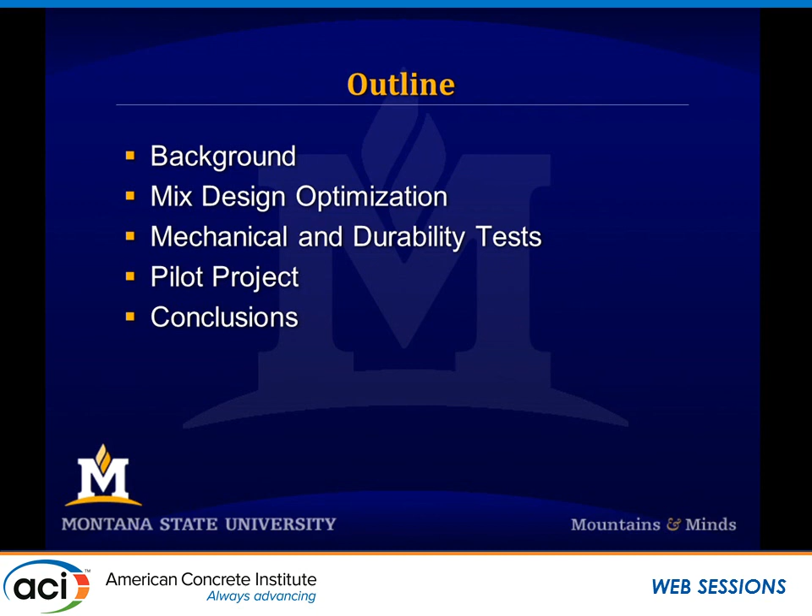So to start things off with the background - as I mentioned a second ago, this is a very important part of this project, why would we do it, right? You might be questioning that right now. Why would you take reclaimed asphalt pavement, millings off of an asphalt highway, and put it into concrete to use it as a pavement? That's a very good question, a legitimate question.

One of the reasons, and I think that Montana has a pretty good reason for doing so: there are large stockpiles of RAP in Montana. Why is there large stockpiles of RAP? Well, one reason is Montana is the 4th largest state in the country in terms of size, not population. We're sitting at just under 1 million in population, but the 4th largest state in terms of area. And that means there's a lot of roads, right? And there's a lot of maintenance on those roads, and we then accumulate a bunch of RAP.

Well, RAP typically gets used quite often as aggregate replacement in hot mix asphalt. But the contractors in the state of Montana do not use it extensively back into their asphalt pavement. And in parallel to this project, MDT is trying to encourage and come up with a means of incentive for contractors to start using it more in their hot mix asphalt. But in the meantime, they came up with another need for it, and that's using it in concrete pavements.

The other thing is we have reduced aggregate supplies in the state of Montana. In the western part of the state, where most of our population is, near the mountains, we're okay with aggregates. You go into the eastern part of the state, there's not very many people, not many aggregate or rock quarries and stuff like that for producing aggregates. And so that's somewhat of a shortfall.

And then the primary reason for trying to come up with using reclaimed asphalt pavement in concrete pavements is the Bakken oil boom. If you're from the general vicinity of North Dakota and Montana, you can't go a day without hearing about the Bakken oil boom and its impact on the economy and the infrastructure around there. This Bakken oil boom, with development of fracking and whatnot, there's been a huge boom in eastern Montana and western North Dakota, and this has brought along with it heavy truck traffic that is destroying their asphalt pavements. And MDT would like to add a concrete pavement because it's more durable and they believe that this will withstand the heavy truck traffic better.

And so, behind the theory that they want to pursue, they want to come through and mill the top off of their asphalt highways, then process that RAP minimally, and then put it back down in a white topping, like a 2 or 3 inch topping slab on top of what they had just milled off, and they want this to be more durable. So that's kind of the driving factors behind doing this.

Other states are looking at using RAP. Illinois just finished a study to use RAP in their concrete pavements, and one of the reasons for that is they're using their fine aggregates in hot mix asphalt, but their coarse RAP they're not using, so they have big, giant stockpiles of coarse RAP. So the outcomes of this research could be further reaching than just Montana.

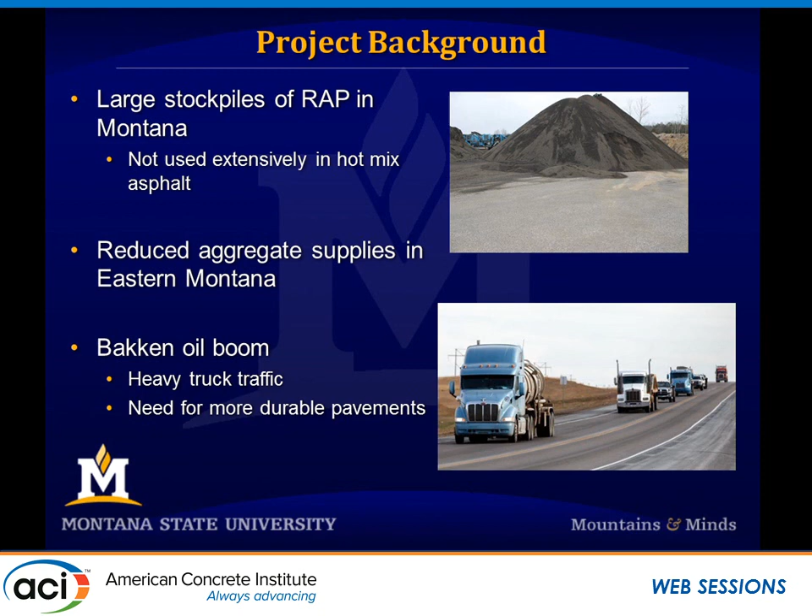The first thing we came up with was establishing a RAP source and coming up with a minimal processing technique. All this research was conducted with RAP millings off of I-15 near Great Falls, Montana. It was minimally processed, meaning we just took the RAP millings directly out of the miller, then screened it on two different screens, a 3/4 inch screen and a number 8 screen. Everything above 3/4 inch caught on that was tossed out as waste, just big chunks of tar and whatnot.

Everything that got caught on the number 8 sieve we called coarse aggregate. Everything that made it through the number 8 sieve we called fine aggregate. We did not do any washing of the aggregates afterwards. This process yielded acceptable gradations.

This is the gradation curve of the fine aggregates, and you can see it's within the limits of the MDT specifications for fine concrete aggregate, or you can just take my word for it. In terms of the coarse aggregate, we deemed this acceptable. It's off on a couple of sizes, but not too bad, especially considering where we got it—just milled it up off the surface, split it on number 8, and called it good.

That was our minimal processing. Another important aspect: it yielded about twice as much coarse as fines doing this, so by weight we had about twice as much coarse aggregate as fine aggregate. This was consistent between RAP sources—we tried a bunch of different RAP sources from around the state, and these gradation curves were about the same when we applied this process. So that was our RAP source.

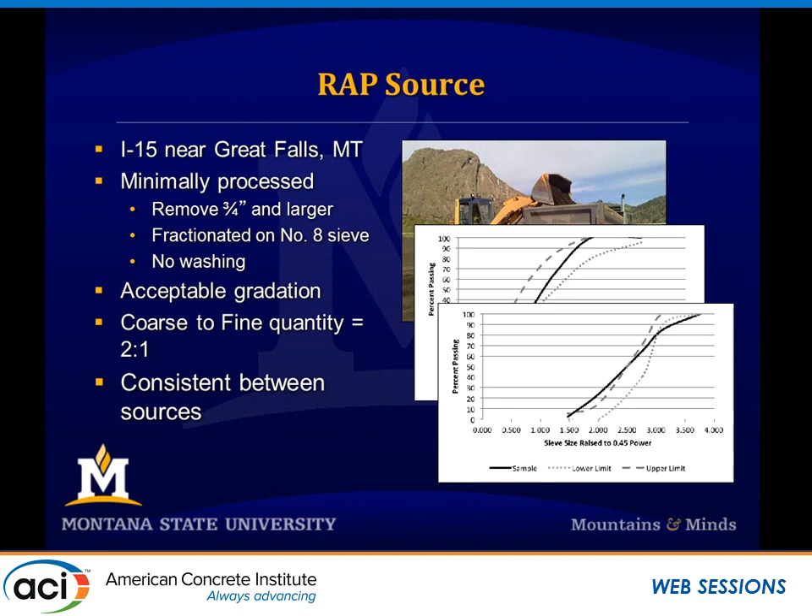We did find some issues with it. When we tried to quantify the moisture content, that was very difficult. All of this stuff has an asphalt coating on it, so how you define what SSD is, what the moisture content is, and how you heat it up to dry it out so you can measure these things, was really difficult. We decided this is going to be an issue going forward.

The other issue was these conglomerations of binder and fine aggregate. Here are some pictures of cores we took afterwards—you can see both of these would be considered coarse aggregate, right around 3/4 of an inch, but it's not really a coarse aggregate. It's really a clump of tar with some fine aggregates inside of it. We believe this played into our decrease in performance, which we'll get into in a little bit.

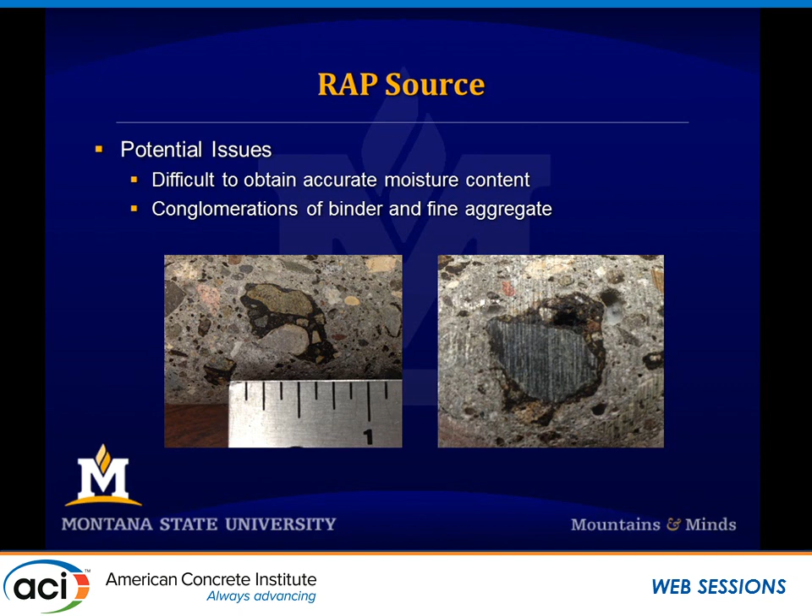But we wanted to stick with our minimal processing technique. So in terms of mix design optimization, how do we come up with mix designs to meet our objectives? Our objectives were: we wanted to use 15% fly ash replacement, to help control ASR and help on the green side of things—we just wanted to replace some of the Portland cement. So we had that fixed parameter, 15% fly ash replacement.

We also wanted to maximize the RAP content. Previous research and some of our screening batches told us that you can't replace all the aggregates in concrete with RAP—if you do, you don't get a very strong concrete and can't meet some specifications. So we had to replace just some of the virgin aggregates with RAP, but we wanted to use as much RAP as possible. We also wanted to meet the minimum MDT pavement specifications, which call for a pretty stiff mix of 1.5 inch slump, because they use a slip form paver for casting these concrete pavements.

So 1.5 inch slump, 5 to 7% air, minimum 7-day strength of 2,000 psi, minimum 28-day strength of 3,000 psi, and rupture strength of 500 psi. So those are our constraints in our mix design. We wanted to meet those things.

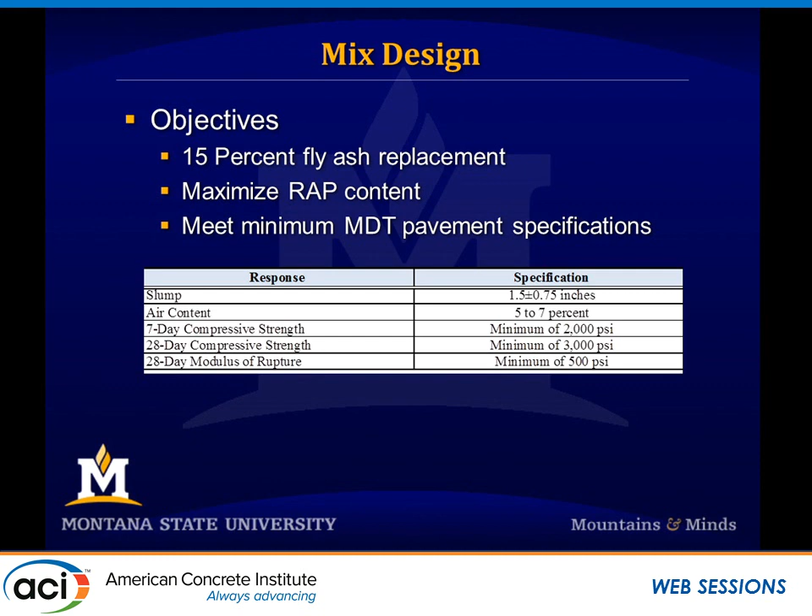Okay, now how we went about doing that, right? There's some other methods out there that you can use for mix design. We chose to do a response surface methodology, one of the reasons being it was just more scientific-y. It seemed like it'd be a little more fun to do.

You know, I'm a professor, I'm very theoretical by nature, and I had seen response surface methodology, often called design of experiments, get used. What it's used for is to determine the relationship between variables and responses. The variables in this case we can think of in terms of the mix design—what the paste content is, what the water cement ratio is, what the RAP replacement rate is. Those things are considered variables, and those have effects on responses.

Response being 28-day compression strength, slump, air content—those are considered responses. And so it's a method for coming up with a relationship between those two things, in particular when there isn't a mechanistic relationship between it—when there isn't a direct cause and effect type of thing.

It gets used routinely in industrial processes—in this case, misspelled processes. So I know that that's misspelled, don't judge me on that, I just noticed it a second ago. So industrial processes, it gets used often in that, right? And it does not get used in concrete mixture design very often. It has been used a few times, but not too much.

But what it allows you to do is, for a minimal amount of trials, maximize your output. You understand more of the process with a minimal amount of trials. It gives you interaction between variables, and then it works really well for optimization. So this is kind of the reason behind using this response surface methodology. If you're familiar with it, we chose a central composite design for various reasons, but that's the design that we use.

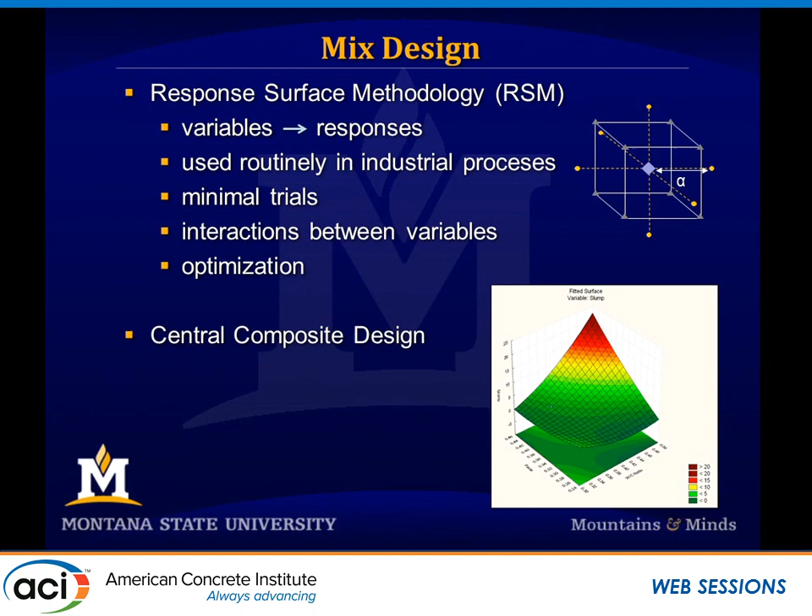So we did a little research project within our research project to apply this methodology to optimize our mixes. The way the procedure works is you go into response surface methodology and say, these are my variables and these are the ranges of my variables. Then the response surface methodology says, great, do these mixes. You then perform those mixes and measure the responses. Once you get those responses, you plug it back into the response surface methodology, and it fits some surfaces to it.

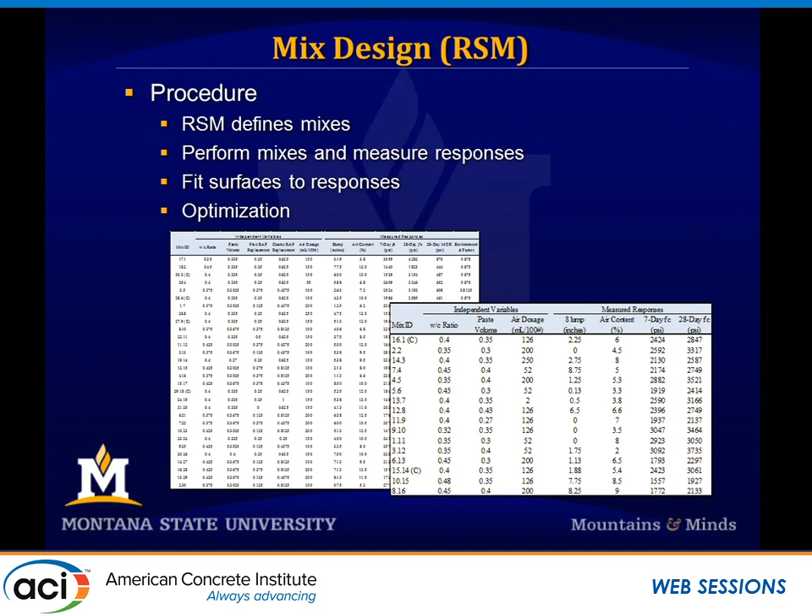And what this step is, is regression. It just fits equations to your responses and applies a bunch of statistics stuff that I don't quite understand fully at this time. But then it pops out these surfaces and confidence in those surfaces, and then you can use that for optimization. That's kind of the process used.

So it was carried out in 3 phases. We ran some screening mixes to get some general idea of ranges and whatnot—the ranges of the variables and what responses were important and what variables were important. Then we did a broad range response surface methodology over a big, wide range of variables, and in this case 5 variables and 5 responses, which resulted in 30 trial mixes.

We ran through those 30 trial mixes, and we had a few issues with it. Mainly, it was just off-center a little bit. We were targeting a certain area, and we were off a little, and so when it came to optimization, it didn't work out the way that we wanted to. So we did a more focused analysis where we narrowed our scope and redirected, which was 3 variables and 3 responses, and that one worked out really well. I'll talk to you a little bit more about some of those results.

There's the ranges. The variables that we used in the first one were water cement ratio, paste volume, fine RAP replacement, coarse RAP replacement, and air entraining admixture dosage. In the second one, we used all of those things with the exception of the fine and coarse RAP replacement.

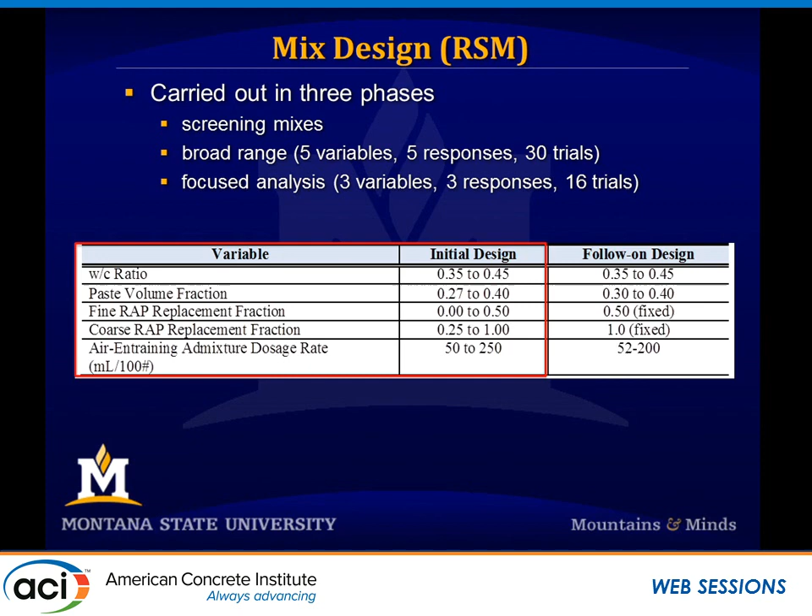Our initial study told us something about the effect of including RAP, and then we fixed that for the second response surface analysis. The first one was a good fit. We were off target a little bit, but some of the key findings told us where to aim the second time.

We were trying to use a standard moisture content correction method for mix designs, and we found out that wasn't working. It was adding scatter to our data, so we removed it and didn't do moisture content corrections afterward. That seems a little crazy, but it actually helped us control variability by not adjusting for water, because that was adding a bunch of variability to it.

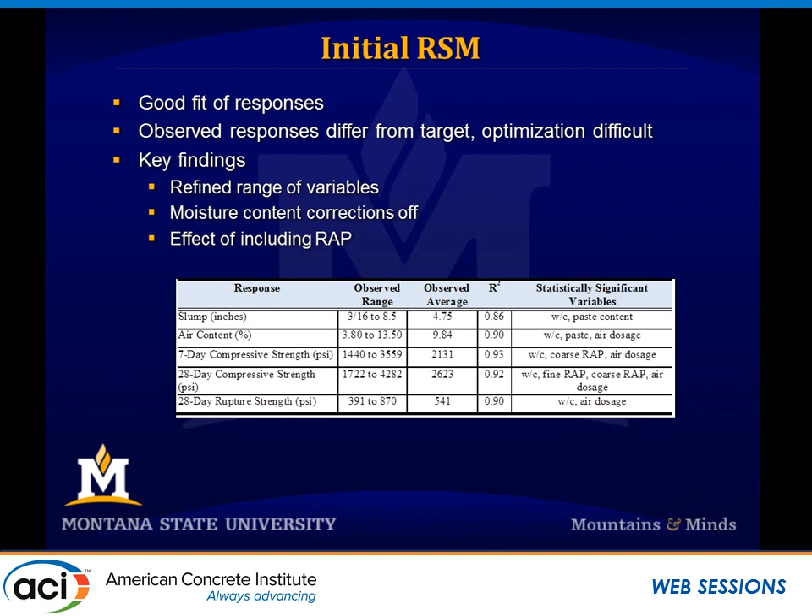And then the biggest thing it did is it told us the effect of including RAP. Including RAP did not affect slump or air, so it didn't affect our plastic state properties. But then it has a significant effect on strength.

This is 28-day strength on the vertical axis. On the horizontal axis is the fine RAP replacement rate, going up to about 50% RAP replacement. The difference between each of those lines is the coarse RAP replacement rate. Going from left to right, you see that our strength just tanks when we include fine RAP, and it also decreases when we include coarse RAP as well.

So that really quantified it. This was a surface fit to the data afterwards, and it showed us we quantified the effect of including RAP, with an R-squared value in terms of regression of around 95%. So the model fit it really well, it was just off target. So it does bad things to your concrete.

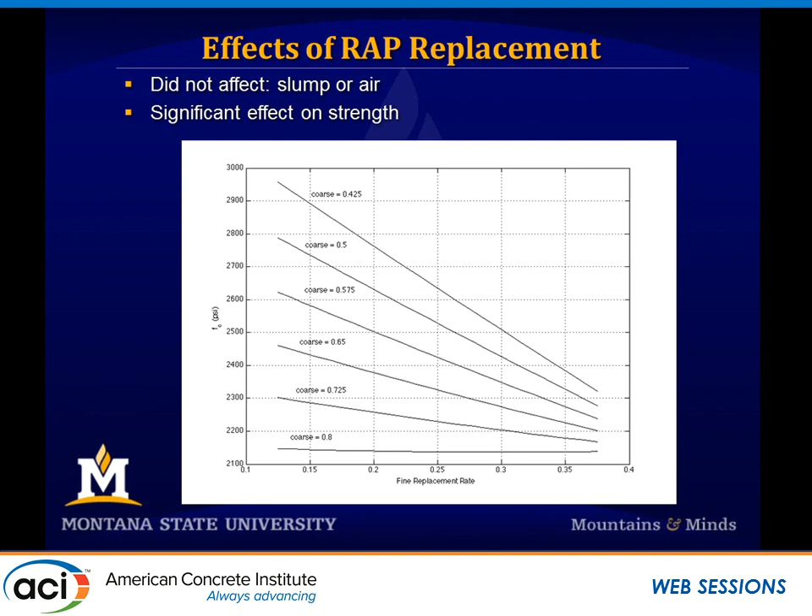And we think the reason for this is the asphalt binder that's on the outside of our aggregates. When we did our more focused response surface methodology, we fixed the RAP fractions at 100% coarse replacement and 50% fine replacement, because one of our goals from the beginning was to maximize the amount of RAP that we use in our concrete.

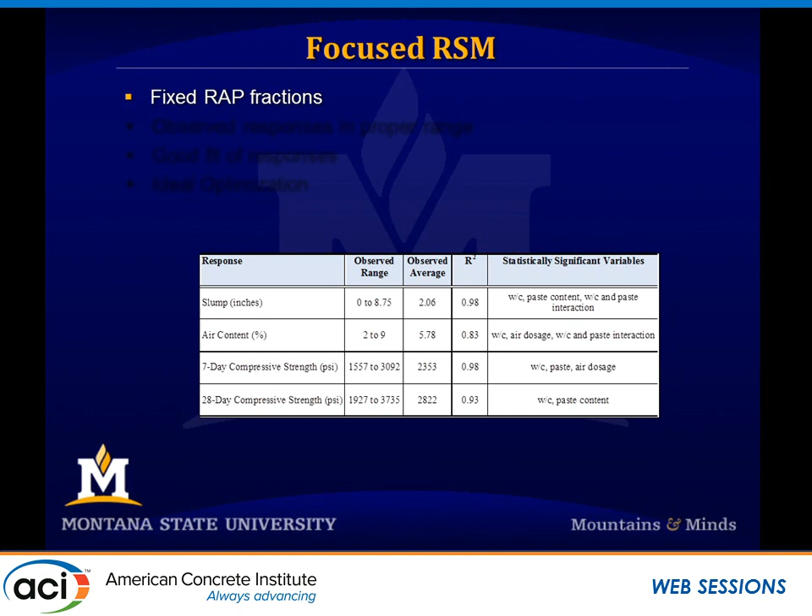We were getting a yield ratio of around 2 to 1, about twice as much coarse as fine. So using 100% coarse and 50% fine yielded about that 2 to 1 ratio, so we could maximize the amount of RAP. We knew we could meet the minimum specifications by throwing all of the RAP into it. So we fixed those things, and then we went on and looked for the paste content, the water cement ratio, and the air dosage rate that met those specifications.

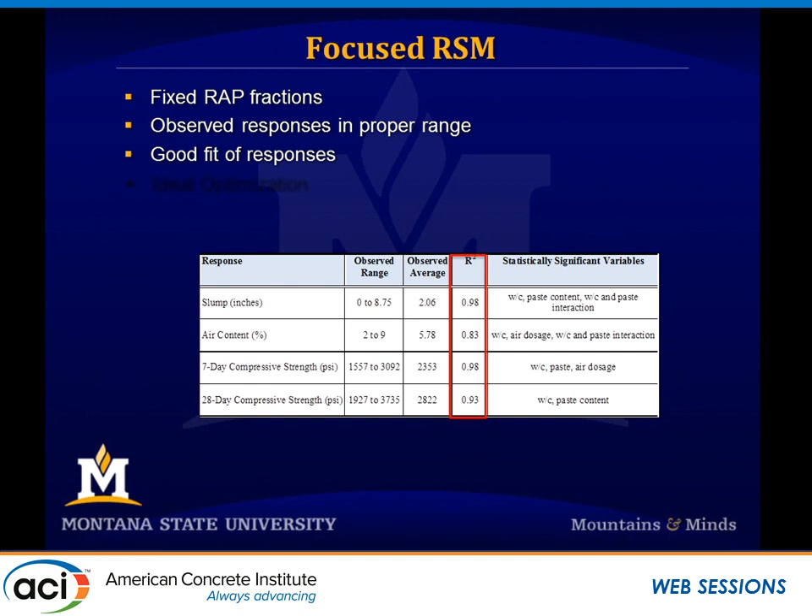So we ran this response surface methodology. Again, good fits. You can see that our observed range is about where our targets were, at 1.5-inch slump, 6% air, 3,000 PSI at 28 days. So we were in the general vicinity, so this one was going to work better. Our R-squared values, our measure of how good our equations matched the data, were in the 80s and 90s, so these are all good. It was ideal for optimization.

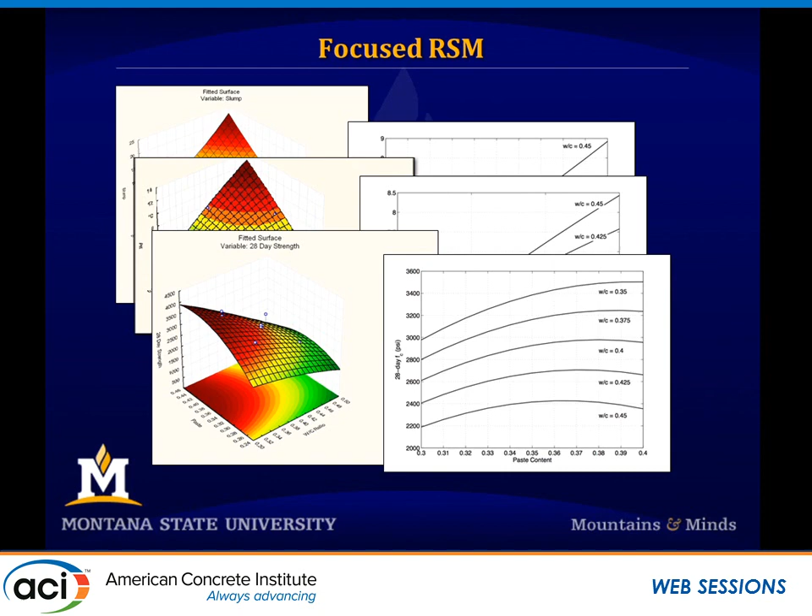So we tried some optimization. Here's just a plot of the curves, or the surfaces, for each of the responses, giving an idea of some of the output of running this response surface methodology. These are the response surfaces in response surface methodology, but basically these are equations that correlate the variables to the responses. Once we had these equations, you can use them for optimization.

So we came into this and said, all right, let's optimize this thing, let's get the mixtures we want. So we did one mix, and said, response surface methodology, give us something that meets all the MDT specifications: 1.5-inch slump, 6% air content, and 3,000 PSI, which is what we put on the constraints. We said give us that, and it returned: use a water cement ratio of 0.386, a paste content of 0.346, and an air dosage rate of 180.3 milliliters per 100 pounds of cement. So that's the output of our constrained problem here.

So once we got that, we came back and performed that mix in our laboratory and measured the responses. We got a 1-inch slump, 5% air, and the best for last, we predicted a 3,000 PSI concrete mix and got 2,949. Getting a 1-inch slump when we wanted 1.5 is within the 95% confidence interval, so we feel like we nailed that one. 5% air was within MDT specifications and within the confidence interval, so we nailed that one too. And 3,000 versus 2,949, right? So we're like, all right, this is working, this optimization is working.

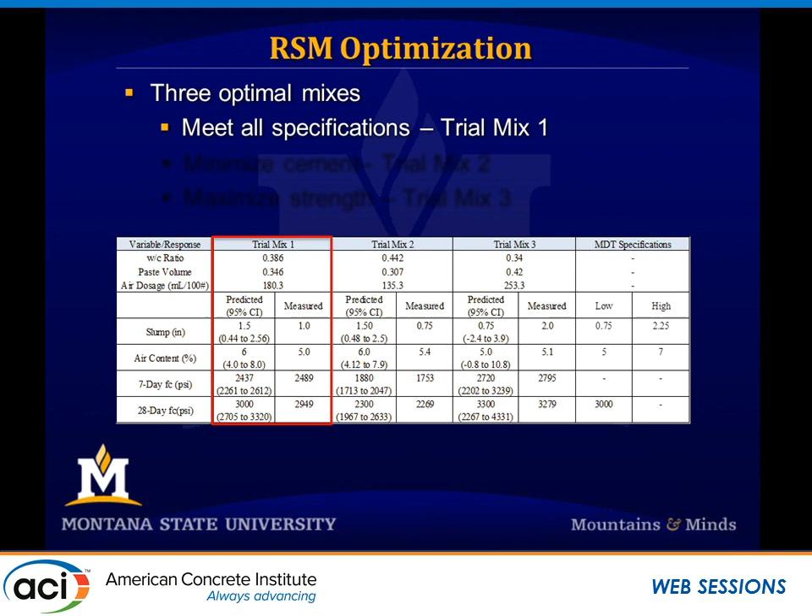So then we said, all right, let's play with this a little bit. One thing to note about this mix: 0.386 water-cement ratio and a paste volume of 0.346, this amounts to about a 7-sack mix. If you're familiar with concrete mixes, a 7-sack mix is pretty rich, actually very rich for a concrete pavement. They're usually in the realm of around 5.5 to 6.5 sacks of cement per yard of concrete. So this is a pretty rich mix.

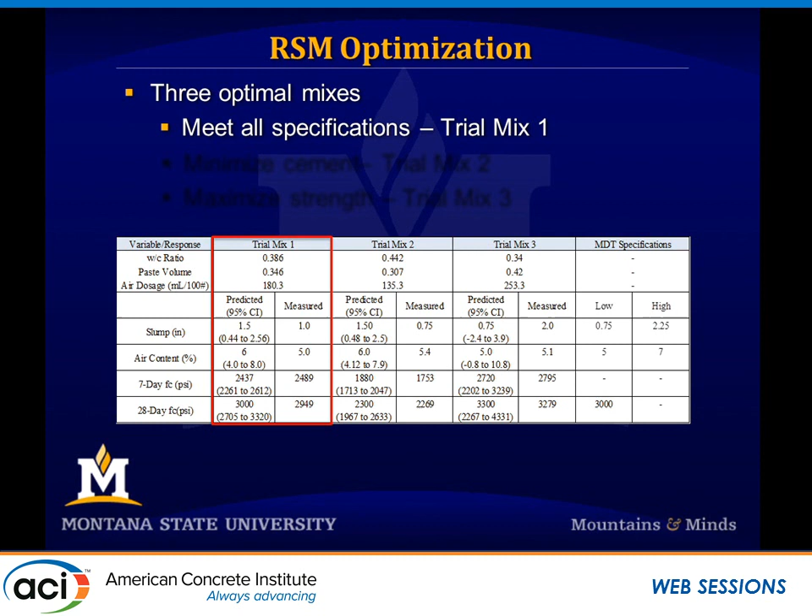So we said, all right, we don't want to cancel out the benefit by having to add a bunch more cement to this mixture. So let's minimize the cement. The way we did that was to just drop off that strength. By minimizing the cement, what you'd expect to happen is the paste volume should go down, because that's where the cement is in the paste. So the paste volume went down, and then to make it workable, the water-cement ratio had to go up. If you remove the flowable part of concrete, you have to add in some more flowable stuff, so you add more water to the mix.

So this is what the response surface methodology gave us, and it passes my test, what it should have given us. For this one, we predicted a 1.5-inch slump and got 0.75. Again, within the confidence interval and within MDT specifications. We got 5.4% air, and 6% was our target. Instead of 2,300, we got 2,269 at our 28-day strength. Again, it was right on. We were pretty excited about that.

We said, one more, let's do another one. Let's just maximize the strength we can get out of this thing. In order to maximize the strength, we put the slump at its minimum value, 0.75, the minimum accepted by MDT. We said, all right, let's drop some of the air to try to increase our strength. So we targeted 5% air, and then for strength we targeted 3,300. We were a little off on the slump, not too bad, and right on the predicted air. Then again, 3,300 versus 3,279, so our strengths were right on.

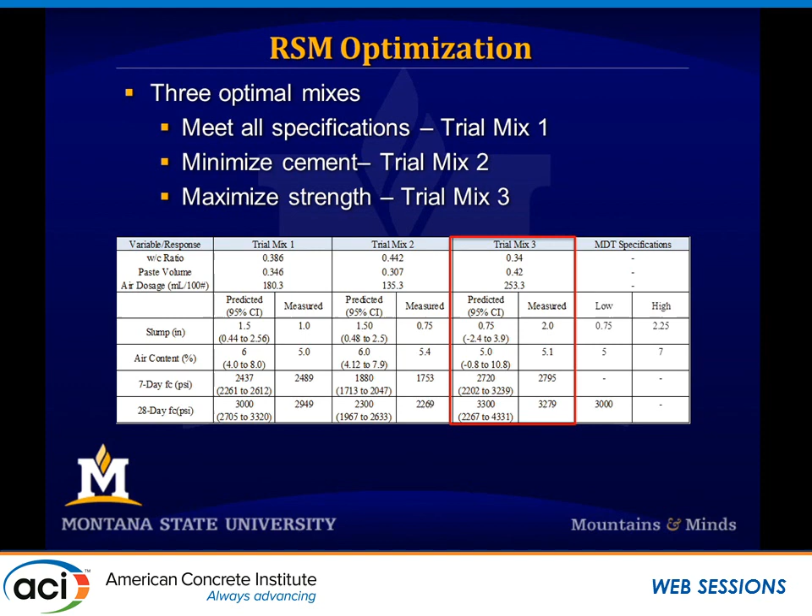This was telling us, wow, this methodology works pretty well. So that's kind of the conclusion of our little mini study, the application of response surface methodology. It works great for concrete mix design. But it did take us a little bit of time to get there—we had to do some screening mixes, then a broader scope, and then a more narrow scope. So we went to MDT with these results and said, hey, this is what we found.

And they chose trial mix 1 that met the minimum MDT specifications, and they were okay with the 7-sack mix. We do have a current study trying to get that down by using water-reducing admixtures and stuff, to make it less rich in cement. But they wanted to use the high-RAP mix because the goal was to use as much of this stuff as possible. Then they also said, you know, we want to meet these specifications and have a higher strength—we want around a 4,000 PSI concrete mix. Based on what we learned from the first one, we knew that if we cut the RAP in half, we would get that 4,000 PSI.

So we came up with 2 mixes that they wanted to further evaluate: the high RAP mix, which is the same as trial mix 1 that just met specifications, and a high strength mix that used half the RAP, so 50% coarse RAP replacement and 25% fine RAP replacement.

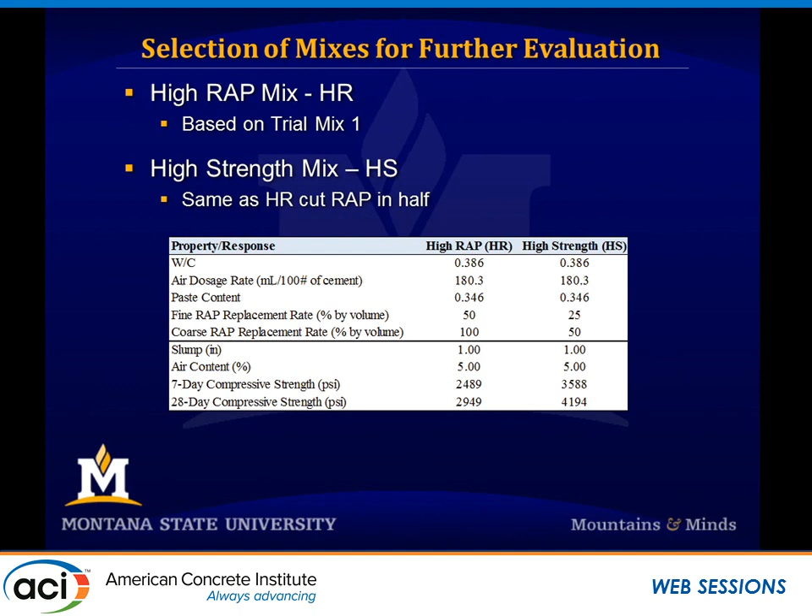And then we carried on a full suite of mechanical and durability tests. The mechanical tests we did were compressive strength, elastic modulus, tensile strength, shrinkage, and creep. The durability properties were alkali silica reactivity, absorption, abrasion, chloride permeability, freeze-thaw, and scaling.

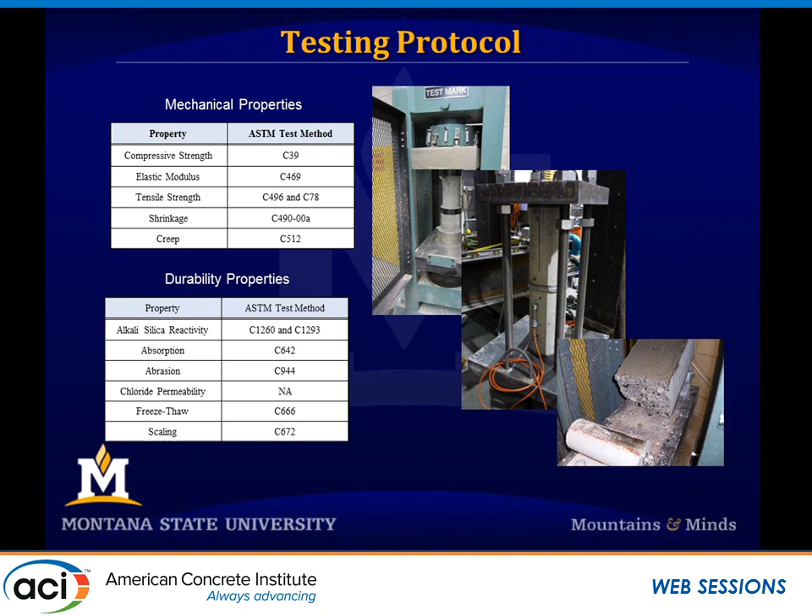So we knew that including RAP decreases your compression strength, but does that necessarily mean all of the other properties are going to be bad? I mean, does that mean your abrasion or your freeze-thaw performance is also bad? Not necessarily. And that's kind of what we found here - just because the strength is bad doesn't mean everything else is going to be bad. So we ran those things.

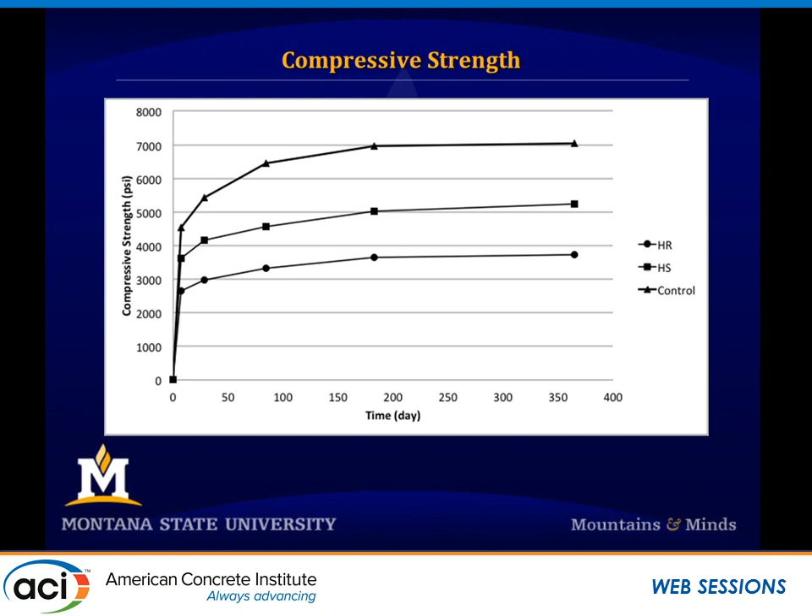Does that mean other things are going to be bad? Not necessarily. Do you need a lot of strength in a concrete pavement? No, you don't need 7,000. All you really need is 3,000, because pavements don't attract as much load or aren't counted on to carry as much stress as structural concrete. Here's the elastic modulus.

Florida DOT just completed a study on a similar project using RAP, and they did a finite element analysis using this reduced stiffness and showed numerically that just because you have decreased stiffness means you have decreased stress demand on your concrete. So this is a positive thing, the concrete being more flexible.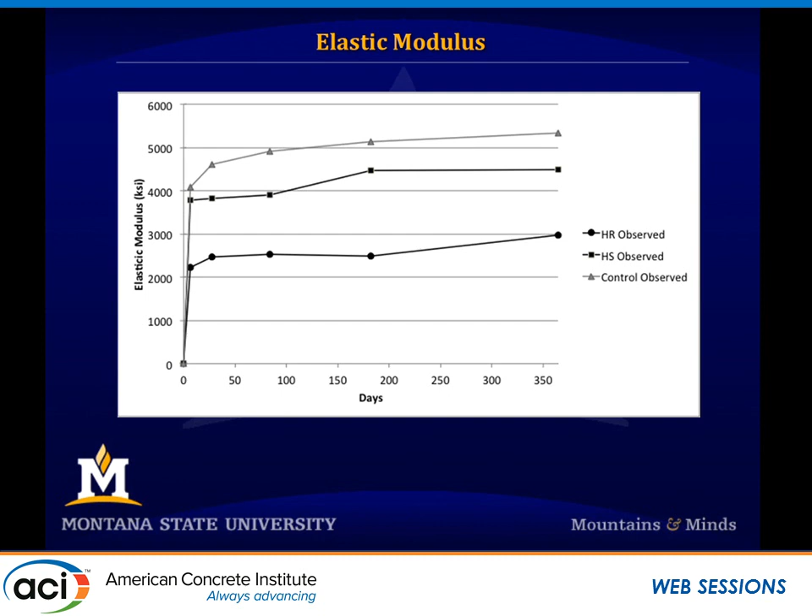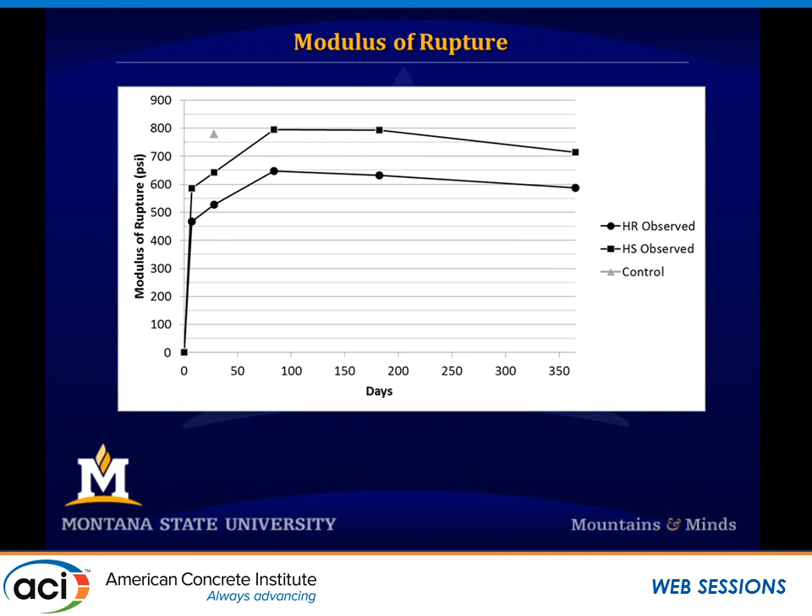Modulus of rupture, the tensile strength of the concrete - you can see an effect there, which goes along and is tied to the compression strength. So we had a decrease in compression strength, you would expect that your tensile strength would be decreased. But it does meet the specifications of 500 PSI that MDT wants, and we easily met that 500 PSI, even in the high RAP mix.

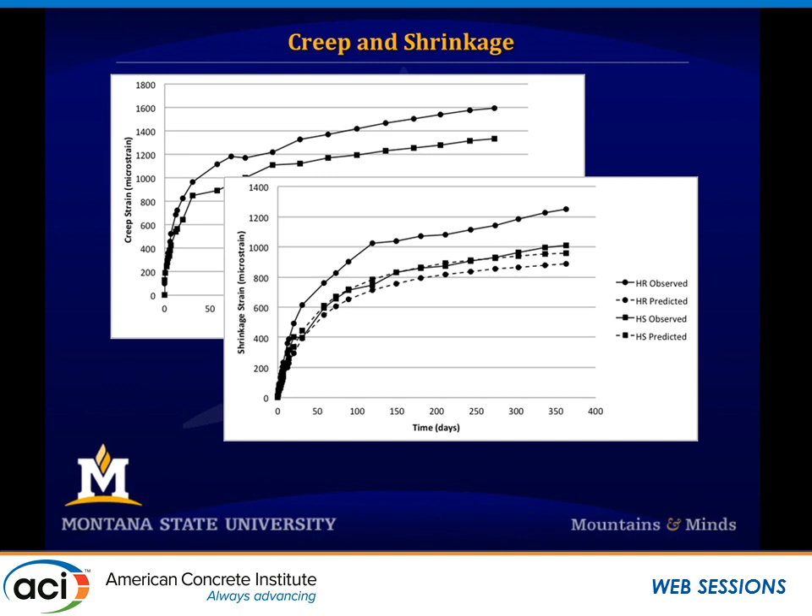Creep isn't necessarily something that's important in concrete pavements - it is in pre-stress and things of that nature, but in terms of pavements, it's not that important. But we had a creep frame and we tested it to help quantify some of this stuff. The high RAP creeped more than the high strength, and in terms of shrinkage, the high RAP shrunk more than the high strength mix as well. But it's also important to note that when we applied AASHTO equations for predicting shrinkage and creep, it was right on with predicting these things. So that's a little side note there.

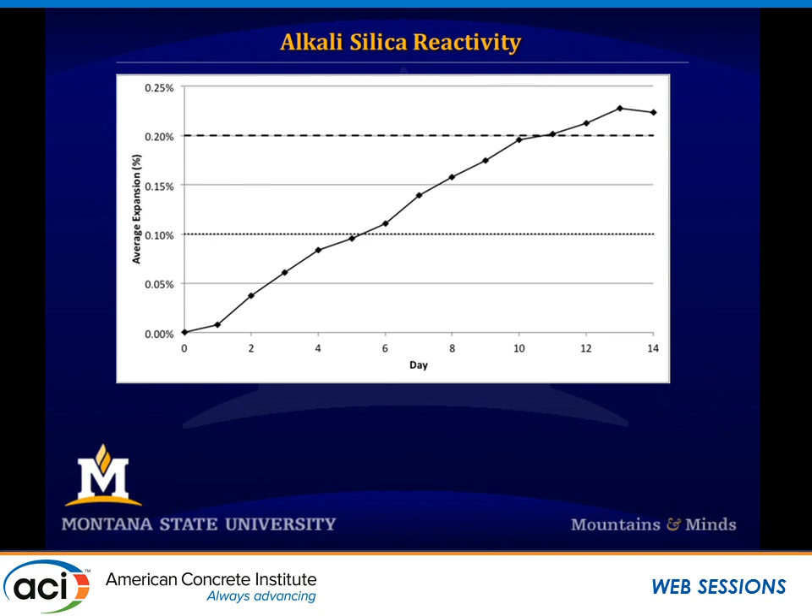Alkali silica reactivity in terms of durability - our data showed that it could potentially be an issue, but we found the problem to be that this is filled with asphalt pavement, so you have a tar coating on everything. This test procedure involved heating these bars up to 180 degrees, and when you heat tar up to 180 degrees, it changes its properties and expands. And that's what we're trying to test with ASR - the expansion.

That was affecting our results, so this test method wasn't necessarily applicable to this material. This was also found with an Illinois study using RAP, that doesn't necessarily work either.

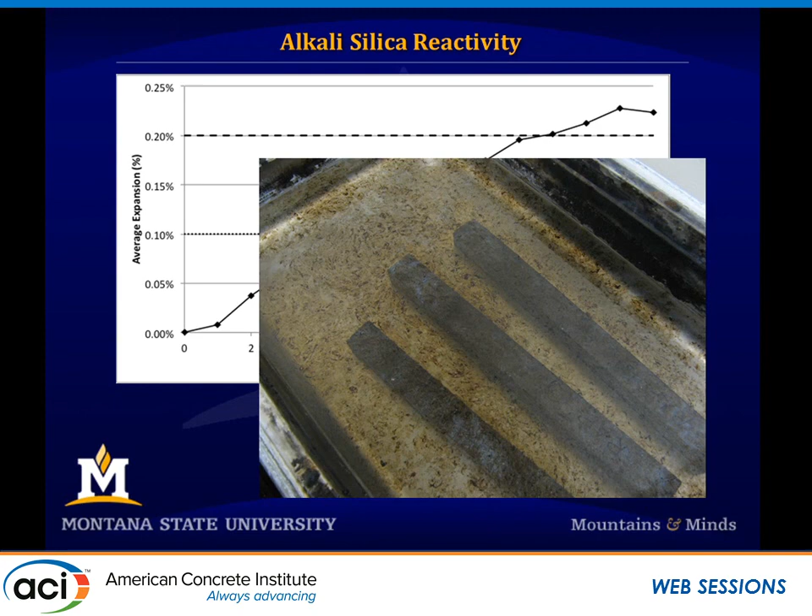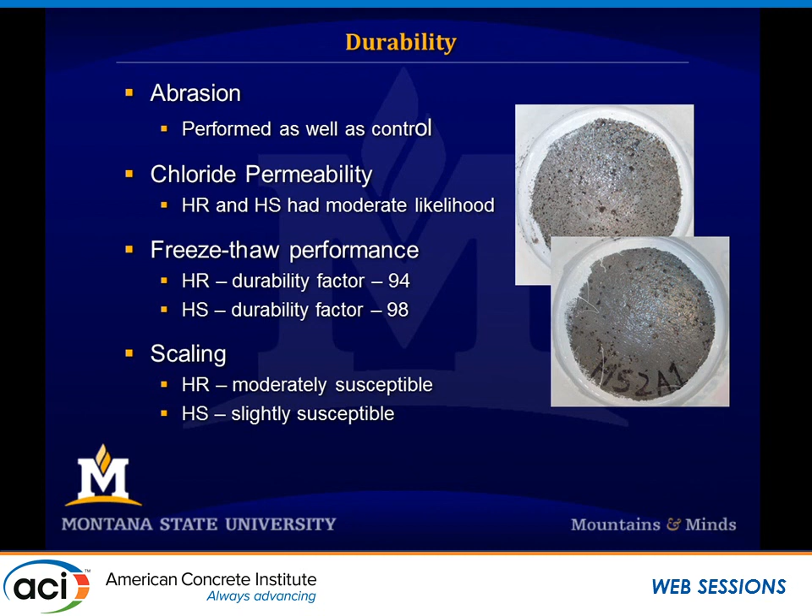In terms of other durability properties, abrasion performed just as well as our control specimen. Chloride permeability had moderate likelihood. Freeze-thaw performance was great - a durability factor of 100 means perfect, and it was close to that. Scaling was moderately susceptible and slightly susceptible, so scaling was not determined to be an issue. In terms of durability, everything was fine.

Decreased stiffness, we're okay with because it's going to attract less load, and you don't need a lot of strength with it anyway. So we thought those were pretty positive results.

The strengths were right on. I was boasting on my strength values and the predictions - on one of these test slabs in our high RAP mix, at 28 days, the concrete strength was 3,001 psi. It looks fabricated, but it was real, and that was the average of 3 test cylinders. Pretty interesting.

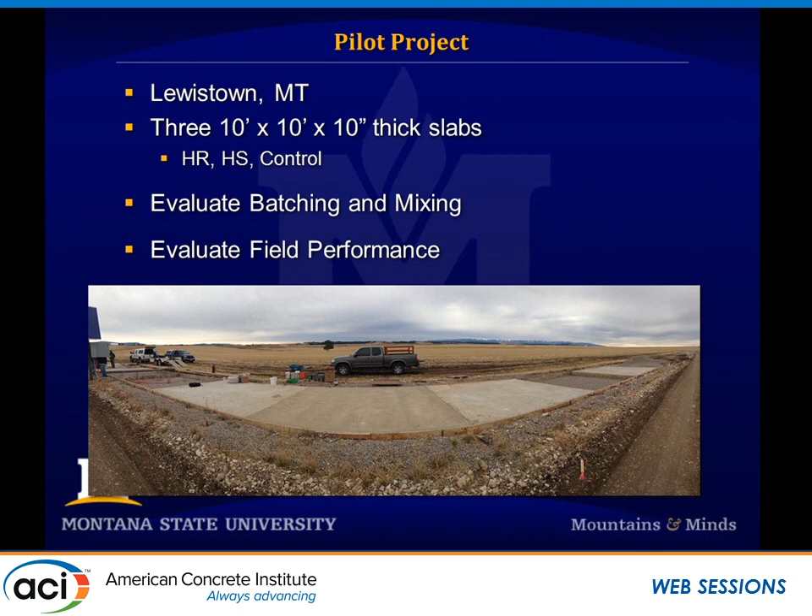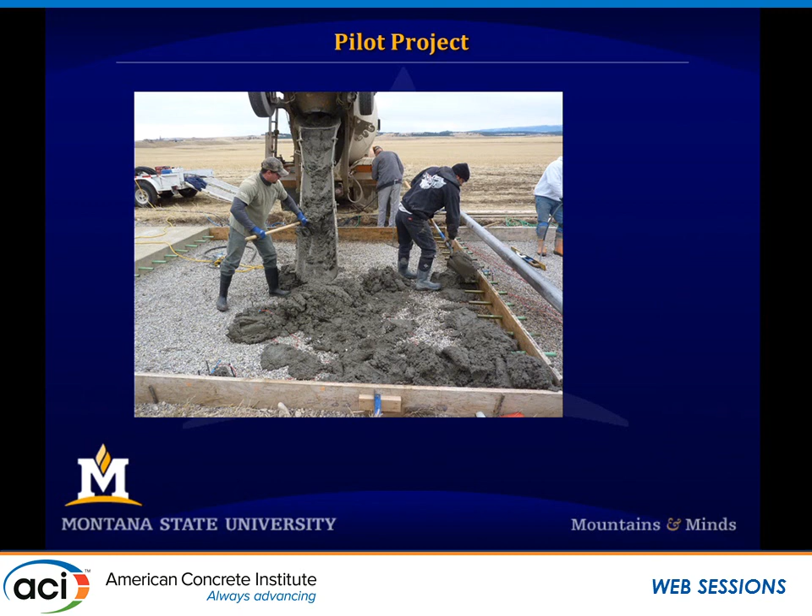So then we applied it there. Here's some pictures - we slump adjusted it and evaluated the field performance. They've been down for about a year, and we're just monitoring to see if there's any curling associated with it, or how it's handling the traffic. Here's just some pictures of them constructing those slabs.

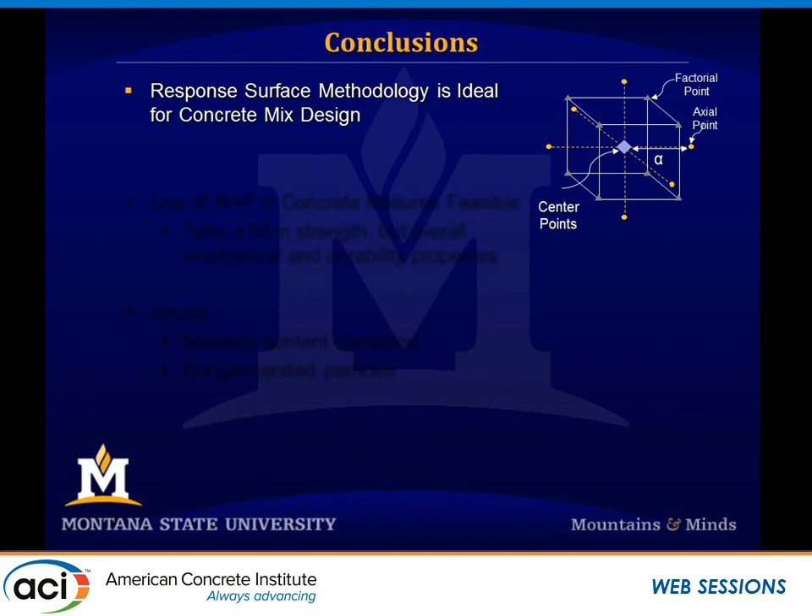So in conclusion, response surface methodology was slick. We thought it was really neat to apply it here. I think back to my PhD studies when I was coming up with numeric or finite element models to model reinforced concrete columns - this would have been perfect for that, being able to minimize the input I had to put in and maximize my output. We thought this worked really well in this particular situation.

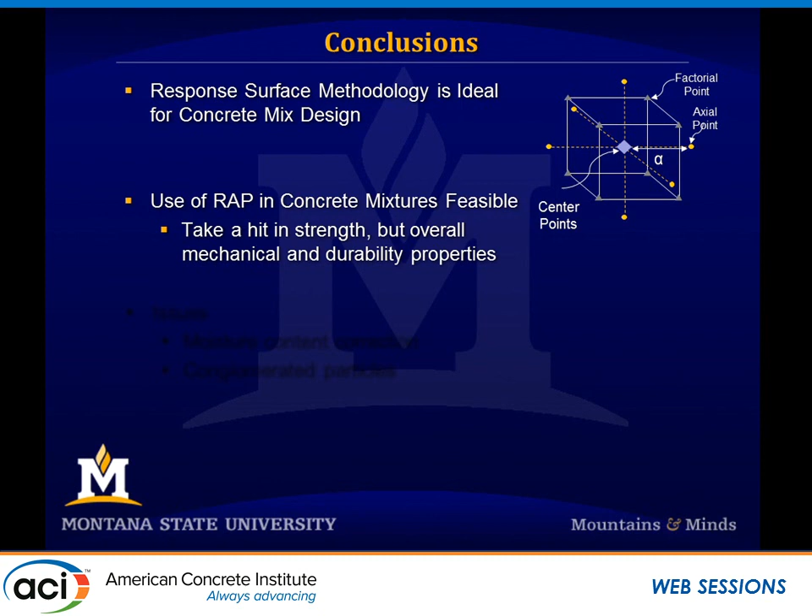Use of RAP in concrete mixtures is feasible. You take a hit on strength, but overall the mechanical and durability properties show that it meets the minimum specifications. It should work well as a concrete pavement.

One of our conclusions as to why our concrete in particular was taking hits on strength, which is also consistent with what Illinois found, is that they had big conglomerations of asphalt and fine aggregates that were counting as coarse aggregates. As for the moisture content correction, the way we accounted for it was by slump adjusting our concrete. Going forward, if this is going to be used more, we have to come up with a better process for doing that.

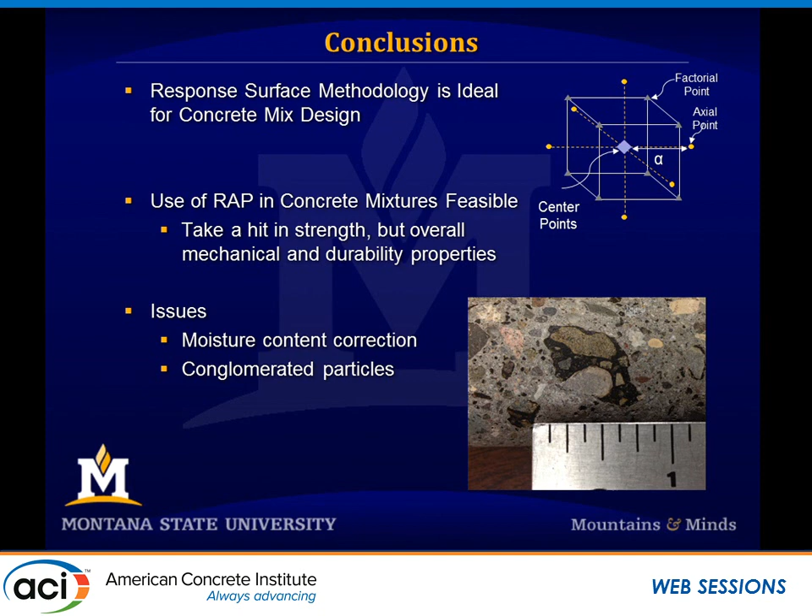So our follow-on research is, again, trying to decrease the cement content in these mixes and trying to come up with a better moisture content correction method.